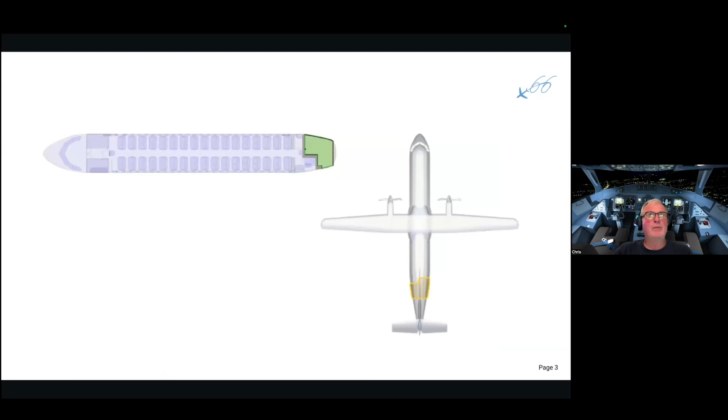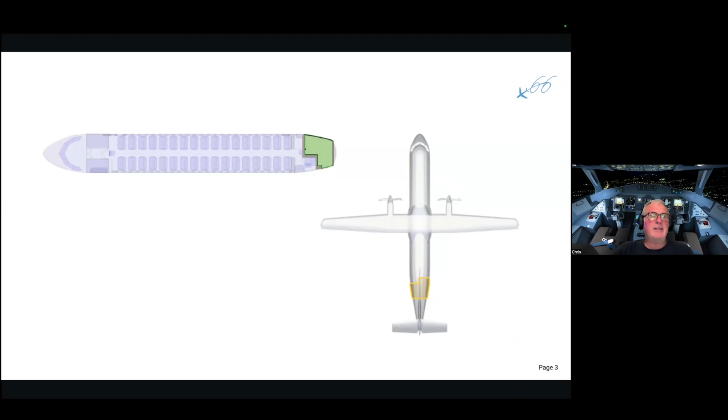So there's two luggage compartments, as ATR call them. One is forward between the flight compartment and the cabin, and the other one is aft on the right-hand side here. Okay, and one will be just behind. Again, depending on the configuration of the aircraft and the mission. The forward cargo compartment is 5.8 cubic meters in volume. No passageway starting from the passenger compartment has been provided.

So this is kind of a weird design, somewhat getting used to. If you look at this picture, the actual entry door to the aircraft cabin is here. So if you sat in row 1A, which is the business class, let's say, you have to get in from the back and walk the whole cabin to get to your seat, because here is the forward cargo compartment with the big cargo door. So a little bit different than what you're used to. Usually the big spending passengers get in through the front door and sit in the front seats. On this aircraft, you still sit in the front seats, but you have to walk through the whole cabin to get there.

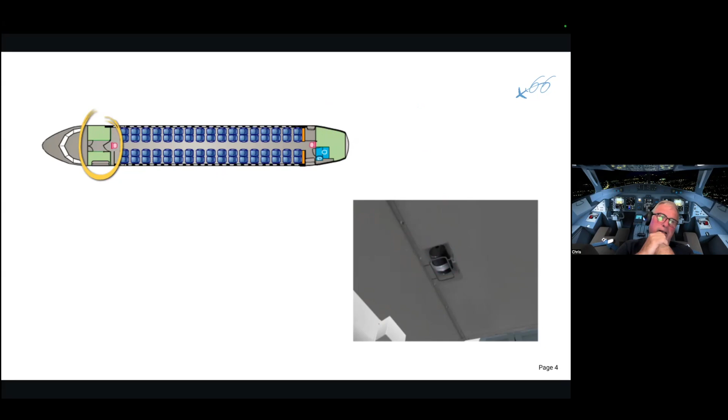Okay, luggage or payload is bulk loaded here, and it's held in by means of a net so that it does not drop during flight. There's also, as you can see from the picture, a smoke detection system installed in the forward cargo compartment. So if we're transporting dangerous goods or anything that meets cargo regulations, we need to be informed if there is smoke in the cargo compartment so that the pilots can perform the associated drills.

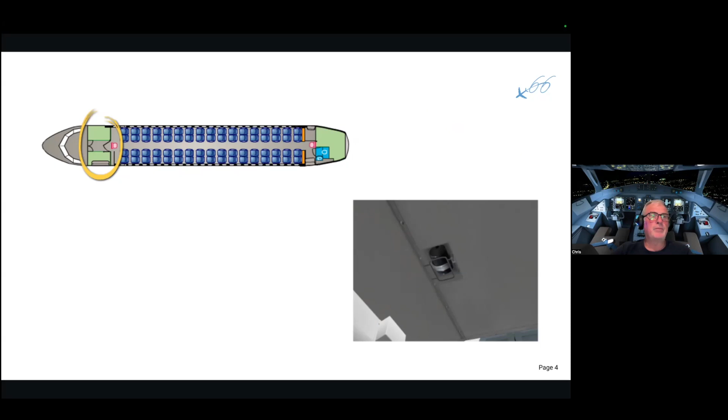So although there's a section of the cargo reserved to be loaded in the aft compartment, due to the criticality of the aircraft tipping, that's another issue. Remember, people get in from the back. If the first 20 passengers getting in are sitting in the aft rows, the aircraft and its CG will be such that the aircraft could overbalance and tip. So in most cases they start by loading the front section first, just to hold the nose down, fitting the cargo first before they start loading the passengers.

Okay, now the aft compartment, you can see here with its little curtain used for fire suppression. The aft compartment has a volume of 4.8 cubic meters. And the loading of this one is made through a service door here. It's of the plug type, and we'll look at it closer when we get to doors, of course. And there's two sections separated by a net.

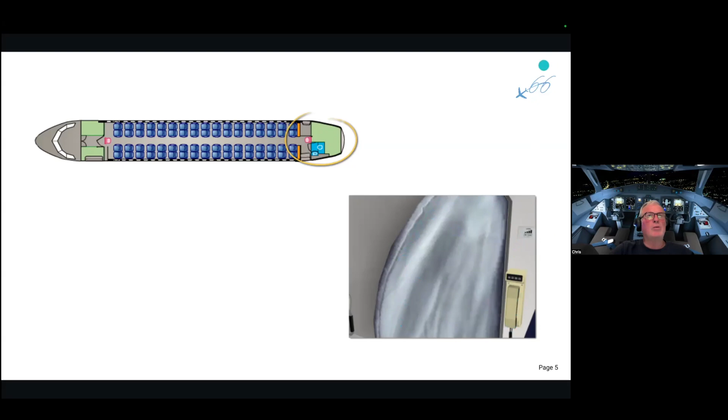The luggage is held by means of a post secured to the floor and a rail to the upper part. These posts can be called stanchions. They're springed at one end so that you can lock them in, and you can slip them in and out as required. There is a cross net secured to the post and the aircraft structure. There is a smoke detector installed, and in the passenger compartment, a fire extinguishing system can be connected to a fixed extension located above the cargo compartment ceiling. The aft cargo compartment is closed by means of a curtain, provided with a quick closing fastener, just like the old jeans, the clip fasteners.

All right, in terms of the cabin itself, the walls are made of lateral panels attached to a back structure by means of screws, ceiling panels secured to a back structure by screws, a cargo compartment bottom panel, so the floor of the cargo compartment is fastened to a back structure also by means of screws.

There is an access door to the lavatory. Okay. Access door to the lavatory water tank, the lavatory right wall, the wall on which is the cabin attendant seat here. Okay.

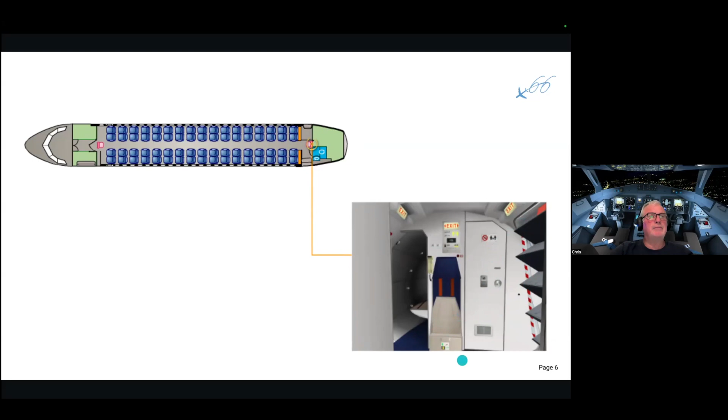There is a galley, as we can see here. It's installed in the aircraft aft section next to the service door. Some ATRs have a so-called dry galley. In other words, there's no running water to it. There's no tap. There's no coffees to be served.

Okay, hot drinks. Some of the galleys, depending again on the configuration of the aircraft and if you're the first owner of it and you get to order what's on it, you can have a wet galley. But the majority of aircraft that I worked on have a so-called dry galley. Okay.

The trolleys of it are non-standard trolleys. They're a bit shorter than the normal catering trolleys, these here, so that they can be fitted to the aircraft through the passenger and crew doors. Okay, by the ground loader here on the right hand aft service door. It's called the service door, this one.

So on the left would be the PAX entry door. Remember we said we enter on the left because on the right hand in hotel mode, we have an engine running. Not the propeller, just the engine blowing hot air here. So we don't want passengers to be entering from this door. They enter from the left. We load the cargo, all the service functions are performed at the service door on the right.

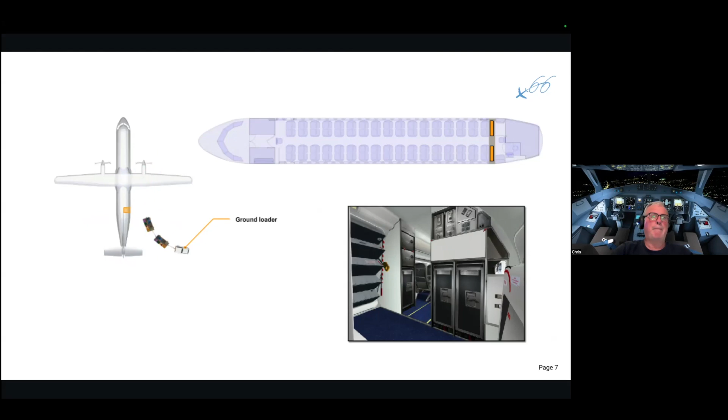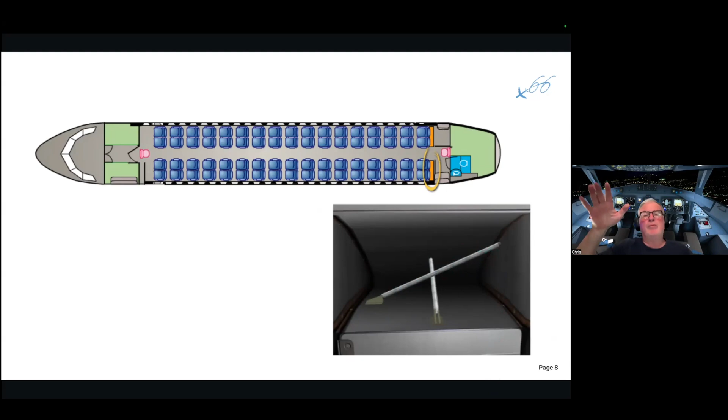So the galley is secured at the lower part by means of fittings to the floor rails, probably screws or fasteners, and at the upper section here by two adjustable rods, right? So they fit them and then they adjust them so that the galley is no longer movable, secured on the floor, and also in this plane here there is a torque and it's not movable, therefore secured. Regardless of what movements the aircraft does, it's all nice and tight.

So the basic galley is provided with two hot jugs. So here we have a wet galley. So there is provision for hot beverages, tea and coffee, 7 standard units, 1 drink trolley half size, a meal trolley half size, and 1 waste container. The waste container and the associated unit are so designed that they can withstand a possible fire originating in the waste container.

The waste one has a flap on a spring that you throw the rubbish in and it returns back, making the waste compartment an airtight compartment so that if there is smoke or fire in there, it can't progress because the flap will close and therefore starve that compartment of oxygen. And if there is a fire and there's no oxygen, which is one of the three elements required to sustain a fire, then the fire will extinguish. So it's a type of fire extinguishing device, having this flap on the top of the waste container for that very reason. Okay.

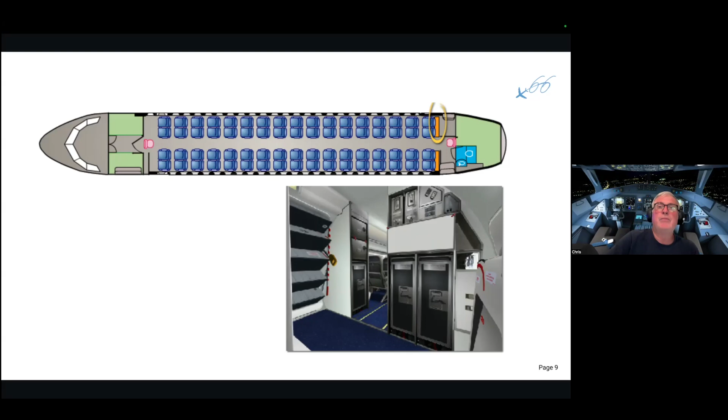Well, yeah, the basic galley does not include any water delivery system, so it's a dry galley. The galley is supplied with 115 volts of variable frequency. So it's a bit confusing, that, typical French. They either have hot water or they don't. If they have hot water, there's 115 volts there to heat it. If they don't have water there, then they don't need 115 volts because they don't need to heat it. Okay? It all depends on the configuration.

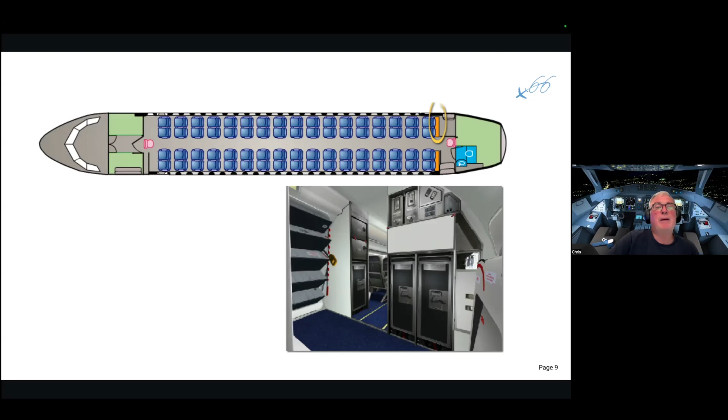There's one lavatory located at the aft of the cabin here. Okay? This is probably aft of the entry door. So the entry door will be here, and you'll come in and you'll see the toilet door to your right, and then the attendant's seat to the right of the toilet door.

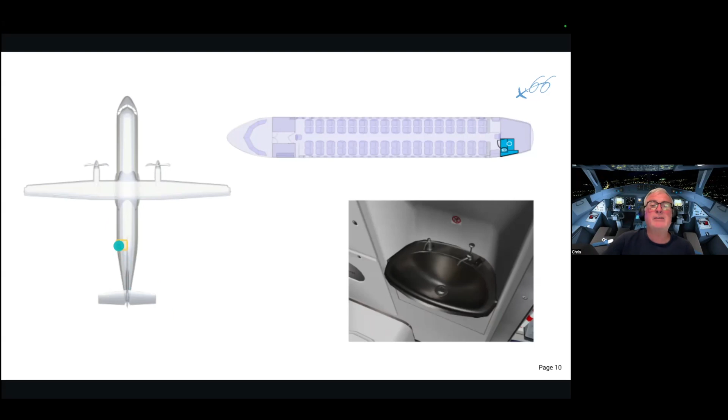Yeah, so the inboard side, and then you'll see in the corner what would be the cargo bay, and if you turn immediately, you'll see the aisle where you can enter the cabin and have seats left and right of you. The backs of the seats, because you will be entering the cabin from the rear. So the passenger compartment is equipped with 3 partitions, depending on, again, configuration.

Passenger seats, okay, again, the configuration we saw in lesson 1 could be from 64 passengers in the 72 version, 64 passengers up to 74 passengers, depending on what configuration you have. We have 1 cabin attendant seat. We have passenger service units, PSUs, okay, on the overheads here, and overhead stowage compartments, which I have to say, the overhead compartments on the ATR, they are pretty roomy for the size of the aircraft. They're a good little design.

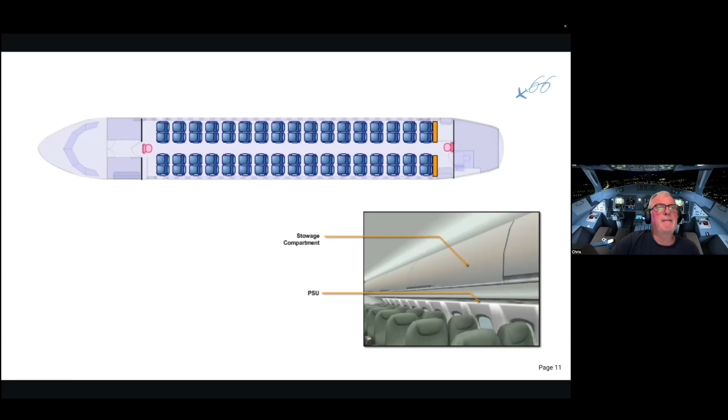So in terms of the partitions or bulkheads, okay, heat and sound insulation is obtained through blankets made of glass wool flakes. So they have partitions that are used to insulate the cabin from noises. They're attached to the inner side of the fuselage lining panels between frames, and they are easily removable. Okay.

Some airlines for certain operations have movable bulkheads where they clip on, so that airlines, for example, that have a business class and then an economy class can actually determine, on how many seats they sold, to move the bulkhead fore and aft to separate a little bit the economy passengers from the high-paying business passengers through the operation of a moving bulkhead that attaches to the ceiling or the PSU and the floor, and therefore can be moved.

All right, a partition also separates the cabin from the lavatory area, and it is secured to the floor. The partition between cabin and aft cargo compartment is secured to the floor on the support fittings of cargo compartment posts and to the ceiling by a rod connected to the aircraft structure.

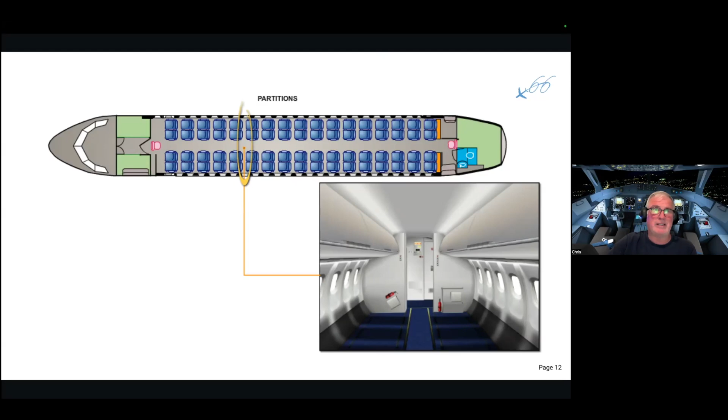The seats themselves, you've all seen aircraft seats, depending again on what type of aircraft you're flying and how much money you're prepared to invest. The good thing about this, as we discussed in lesson 1, is that there's no middle seat, so every passenger either gets a window seat or an aisle seat.

Something a little idiosyncratic about this one is that there is a right emergency exit seat unit, which differs from all the other seats, as the wall side armrest is shorter and the backrest is fixed. So what they're saying is this is an emergency exit, therefore, in order to aid in the evacuation, they've shortened this arm at this position. The idea of this is to open the hatch, chuck it out, and follow it. In order to assist in any way possible, they've made this arm shorter to facilitate evacuation in a rush.

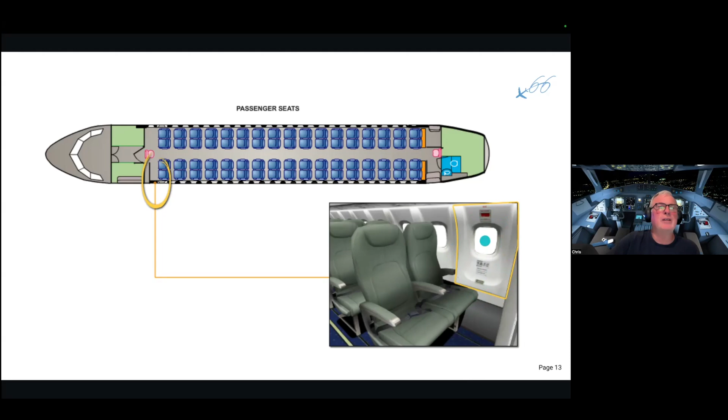Double-seat unit consists of an ashtray. I don't know why they're still building aircraft seats with ashtrays - flights have been non-smoking for years and years now, but they're still building them with ashtrays on the center armrest and the armrest on the aisle side. Each one's got a safety belt, a luggage retainer, a seat pouch for magazines, and passenger instructions. There's also a life vest stowage under the seat, and a folding table which attaches to the backrest of the seat in front of you.

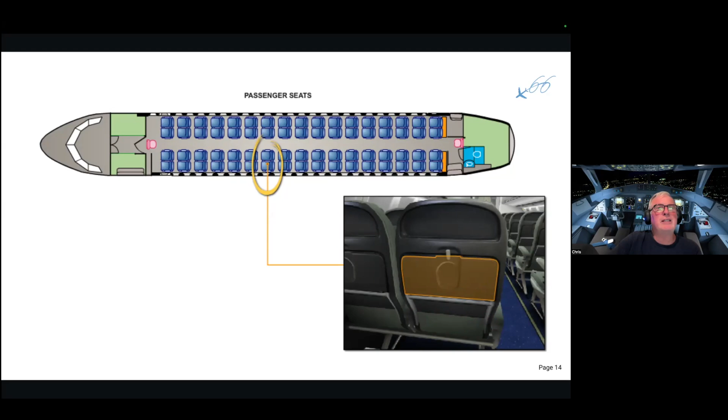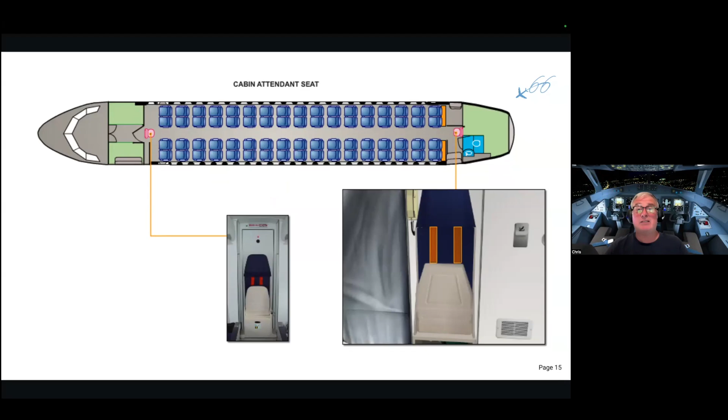The cabin attendant seat is attached to the partition of the lavatory and facing the aisle, so it's aft facing forward, so that the cabin crew can look down the cabin and watch what people are doing. If they're getting out of their seats, talk on the PA and tell them off.

The passenger service unit, which we said detaches and comes down, is located under the storage compartments and above the passengers' seats. You'll see it, you'll know it, because the no smoking, fastened seatbelt sign is usually on it, which you can see here. There are some air outlets, PAX call lights, and some facilities here. We'll see later on, maybe down the road, on a different training - some of them have the facility to drop down and supply oxygen through masks if there's a rapid decompression of the cabin.

We already said that the PSUs are secured by a clip system, and there is a rubber seal - a squeegee seal we call it - where when you clip it closed, you put the rubber seal in and press it with this special tool called a pizza cutter. It's like a pizza cutter but it hasn't got a blade in it, it's got a rounded edge, and you roll this - it's like a garden hose basically - squeegee it down and squeeze it in to secure it closed.

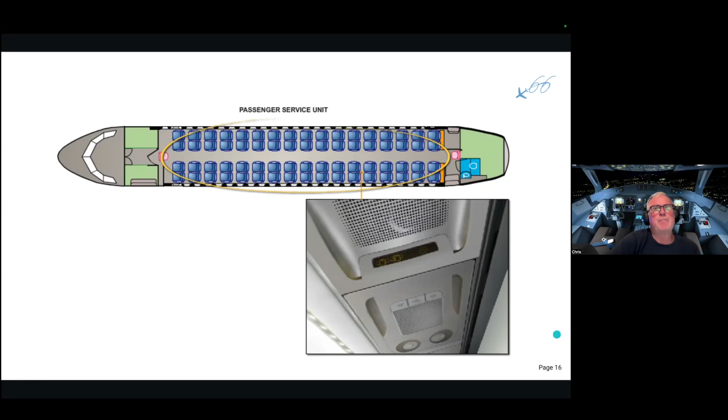So the overhead storage compartments run down both sides of the cabin. Several modules are installed in the passenger compartment ceilings. They're closed by a door that automatically latches closed, and it's held open by means of a gas actuator. So this one here not only holds it open, but also when you open it and let it go, it dampens the operation so that it doesn't flip open without any resistance and break. So it has two functions: to slow the operation of the door, and also maintain it open, by this damping mechanism.

Some of these overhead bins are single, some are double - by double, I mean there'll be two with an area here that has no bulkhead, so you have one unit, but you'd have access to both sides of it. They're very easy to remove - there's quick attach pins which, if you have the special tool, you just press it in on both sides of it and it will drop out. That's necessary because some of the cabin equipment, like emergency batteries or whatever, are located inside the cabin behind these things, so there are provisions for them to be removed quickly in an emergency.